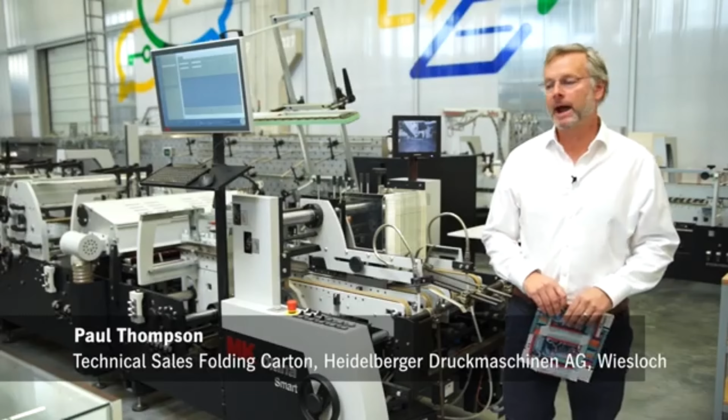I'm part of the packaging team, and I'm standing in front of our latest Diana Smart. And I'd like to continue our progress from printing through to die cutting, where we've seen this particular job being printed on the Speedmaster XL106 and die cut on the PowerMatrix 106 CSB, with obviously cutting, stripping and blanking.

So first off, the machine is actually already set and it's running a four-corner job, and we'll show that running through the automatic packing machine, the Diana Packer, before changing over to the straight line carton, complete with inline inspection and braille. But firstly, I'd like to talk a little bit about the Diana Smart.

The Diana Smart is part of our range of 4 folder gluers, which starts with the Diana Go, moves on to the Diana Easy, which gives us the abilities then for straight line, lock bottom, and also 4 and 6 corner, before moving on to the Diana Smart and then onto the Diana X range of machines, which is our most sophisticated folder gluer with all sorts of modular constructions, including a turning module.

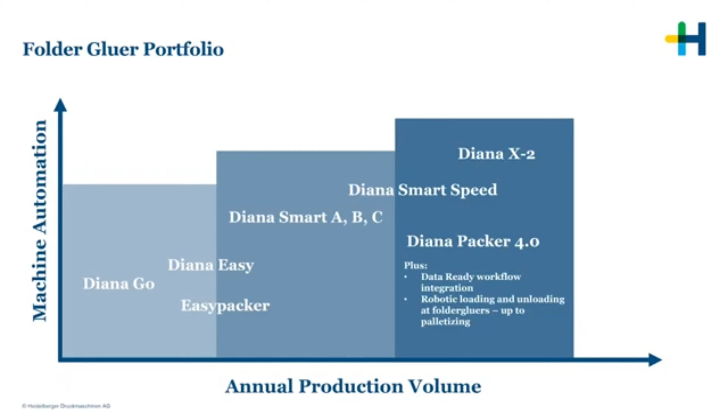On top of that, we also have peripherals around that machine in terms of semi-automatic packing machines, fully automatic packers, which we'll show you later, and also pre-feeders and stack turners. Now the Diana Smart, as very much of a brief overview, comes in 3 versions. It comes in an A model, a B version, and also a C version. The A being the most basic, really suitable for straight line and lock bottom cartons.

The B, we then put in a combination fold module, which makes the make-ready times for lock bottom cartons reduced, because we're now dedicating the lock bottom attachment into that particular module. So that gives us a little bit more flexibility and also enables us to fully utilize the 3-meter pre-fold. The C version also has the combination fold module in there, but it now also has 4 and 6 corner facilities, so we have rear folding shafts mounted into that section.

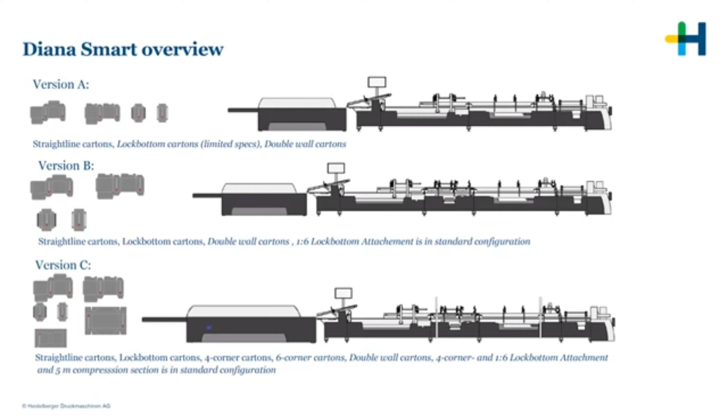In addition to that, we can add lots of other little bits and pieces. So things like the inline inspection module, a braille module can be added as complete modules, and because of the length of the machine and the open construction of the machine, it also enables us to add items like a leaflet inserter. Because it's very open, we have the space to do that, and we don't then take away some of the facilities within the machine. We still have a pre-fold section and we still have the combination fold section, which we can utilize for the folds that we require.

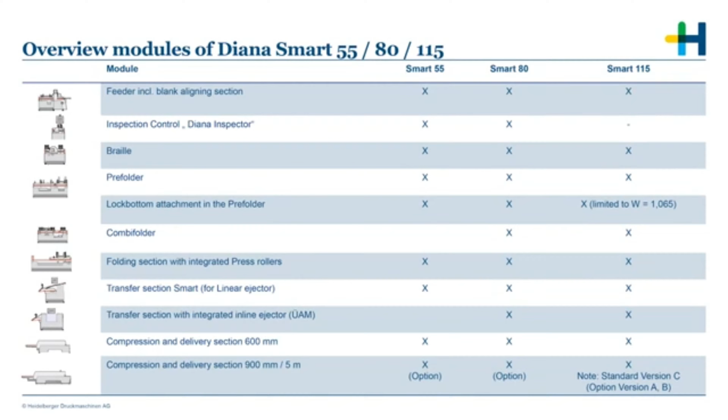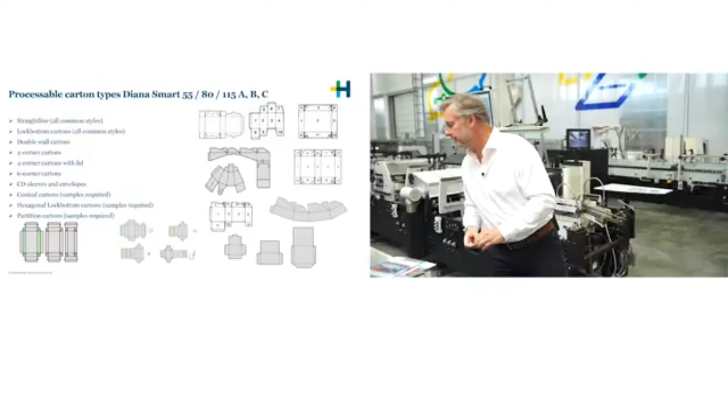As we said before, it is a modular construction, which enables us to pick and choose perhaps which delivery conveyor we would like. We can have a standard delivery conveyor, or we can then extend that delivery conveyor to either 5 meters or 7 meters. In terms of flexibility of the machine and the carton styles that we can produce, we mentioned the basic styles, but when we start to consider other items, we have a very lightweight paper pocket or envelope here.

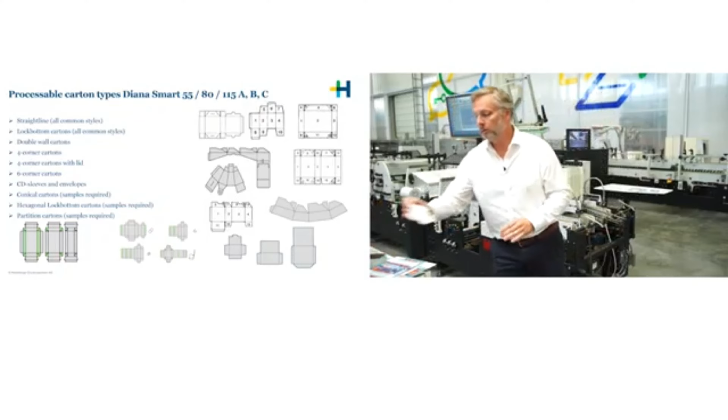We also have things like tapered cartons, so we can utilize the aligning station just behind the feeder by putting in a center carriage. We also can produce document wallets, so something like this. Very small little lock bottom cartons, and then sleeves for all sorts of things. This particular case is a chocolate box wrap.

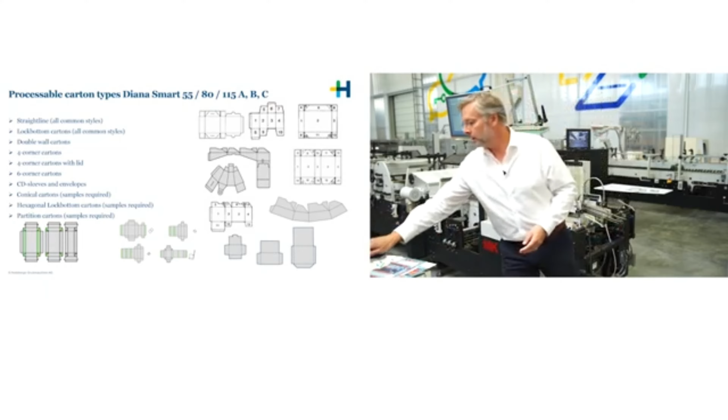And very small cartons. The minimum size of this machine goes down to a 45 millimeter open blank width. So when that carton is folded, that's 20 millimeters. And you can do that on all of our standard equipment. So right the way through from the Go through to the Diana X, we can handle those tiny little cartons.

So when we talk about some general things, we talk about performance on the machine. The belt speed of the particular machine as a standard is 450 meters a minute, but we now have an upgrade also, which will take that to 600 meters a minute, and that will be called our Diana Speed range, which when combined with the packer and also a pre-feeder, obviously you're going to get very high output from that.

The length of the modules of 3 meters in the pre-fold and 3 meters in the final fold gives us lots of flexibility. It gives us space to add additional folding modules. So things like Z-fold modules, small combination fold modules, enables the operator to set the machine very quickly and very precisely without having to mount components down the length of the machine.

The modules themselves are all independently servo driven, and we can drive the modules during the make-ready process. So we have 2 systems for aiding the operator in the make-ready. We have DigiSet, which gives him the opportunity to put the blank dimensions into the screen before going down to the individual digital indicators and winding the carriages all to 0. Once they're at 0, he knows that the position of the carriages are in the correct place.

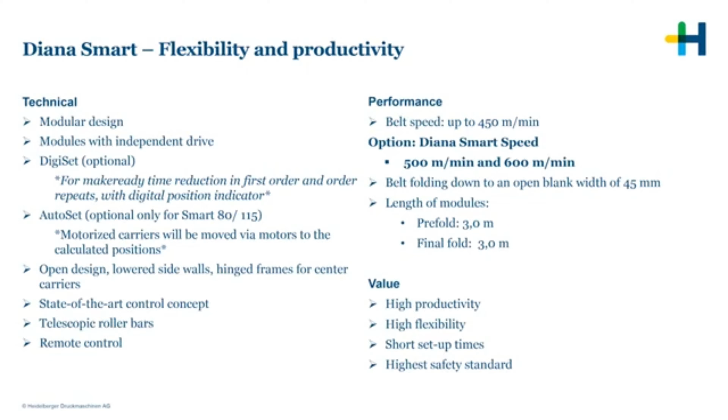With AutoSet, we go one step further. He puts the dimensions of the blank into the computer, and then by pressing the servo motors, can then adjust the position of the carriages automatically. The beauty of that system is when you have a very long machine, you're adjusting a little bit more in one position. And then when you're standing there seeing what you're adjusting, it also enables you to leave a lot of components in the machine without having to take them out.

Telescopic roller bars are commonplace in the machine. We have the ability to move those roller bars in any position. We can also shorten them so we can create space within the machine to make some special folds. So really, in summary, for the value of the machine, we have high productivity, high flexibility, we've reduced the setup times, and we also have the highest safety standards in the market.

So that's a very brief introduction of the Diana Smart. And with this, we would like to take it a little bit further and show you step by step through the machine, features and developments that we've made, and also during that process we'll carry out a complete changeover, and we'll also highlight the features on the Diana Packer.

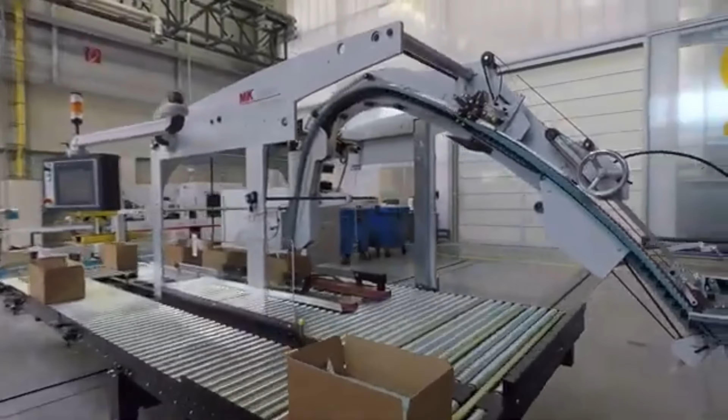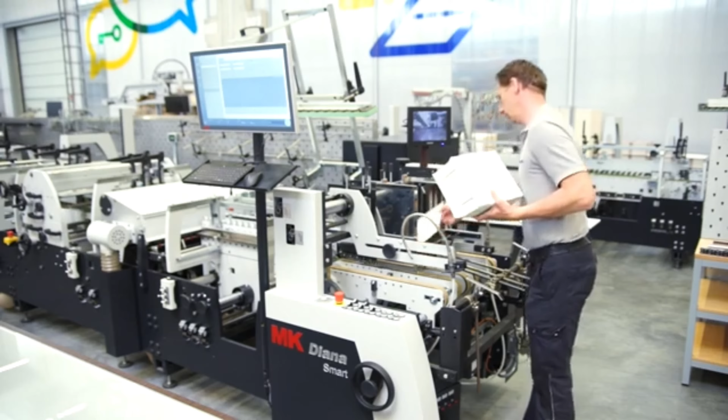So we're now going to show you a complete make-ready from the four corner tray to the straight line carton. So we'll remove the four corner cartons from the feeder. Then we need to carry out several stages before we can actually make the movement in the machine. We're starting at the feeder, we just remove the backstops. We'll lift the feeder sidewalls and loosen the feeder gates.

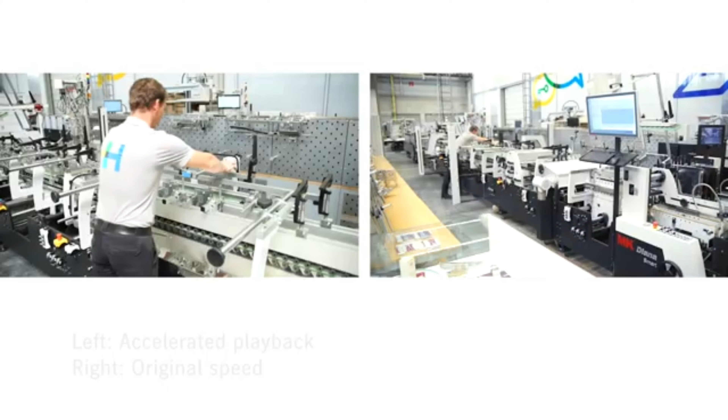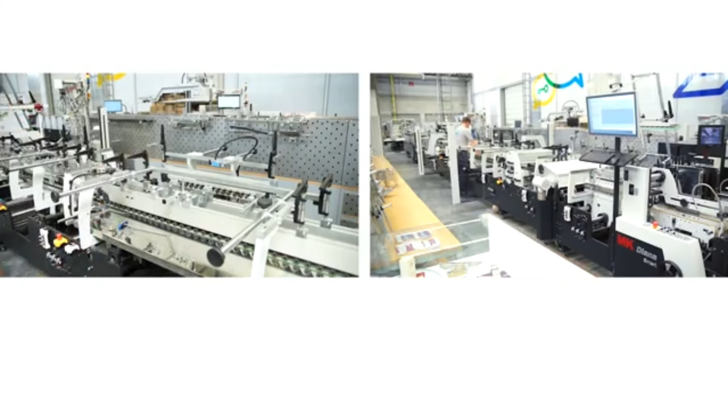Remove the top carriage and loosen it in various sections of the machine. And now we concentrate on the combination fold module. So the first thing we need to do is remove the elements that were required for the four corner carton. We need to take those out of the machine. So really it comes down to taking out the rear folding hooks, the hold down bars, the pickup hooks and the brushes and the plows.

And you'll see here the beauty of the combination fold module, that all these elements are in the same location. So we're not walking up and down the machine removing elements, we are confined to one specific area.

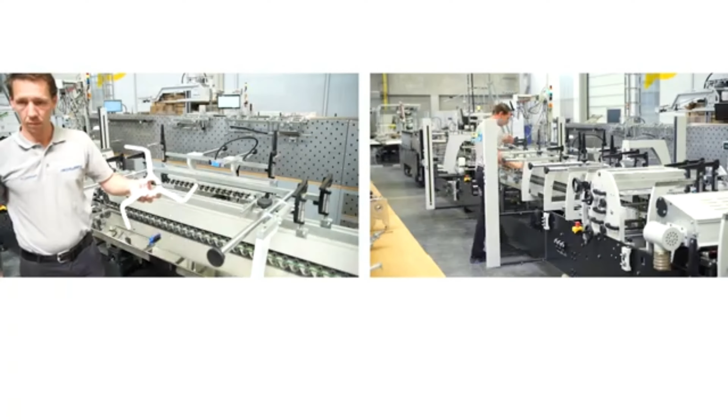The rear folding hooks are very easy to remove. We just split the coupling and then we can take them out of the machine.

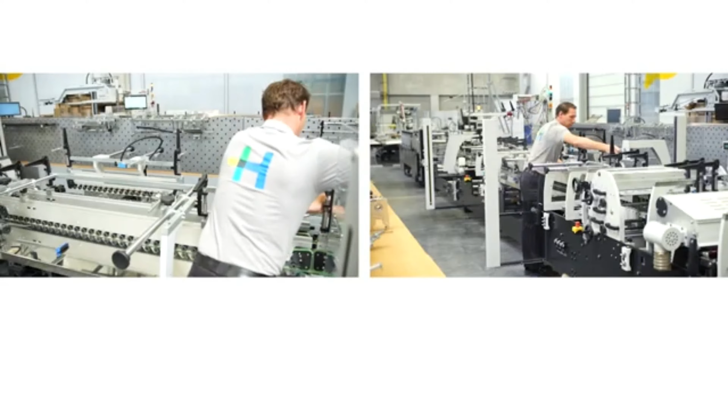These are a couple of snap-in support bars so it stops the 4-corner or 6-corner carton sagging in the middle. These are the elements he's taken out of the machine which specifically relate to the 4-corner carton.

I think it's also important you notice here that he's only used one specific Allen key, so not multiple tools for different attachments to be removed. Because of the design of the machine, it gives him the ability to make the adjustments and take the elements out of the machine just from the operator side, rather than having to walk around to the drive side.

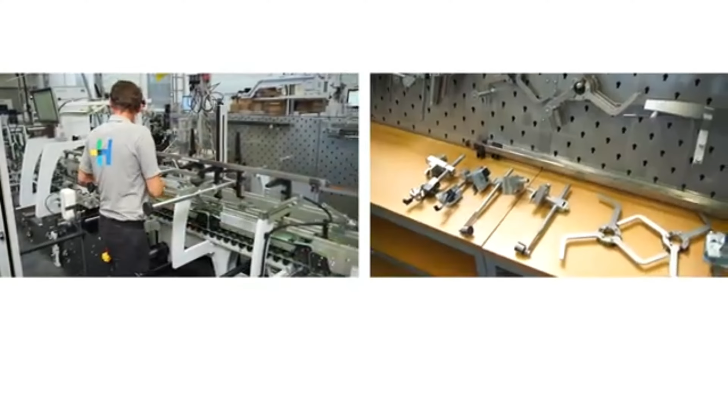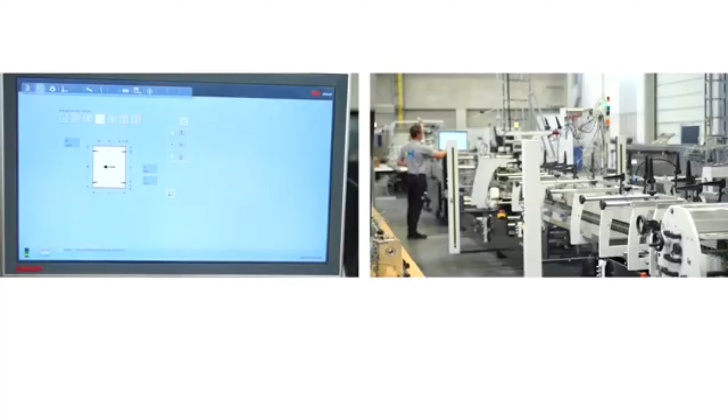So now the components have now been removed. Just prepare the rest of the machine before we program for the next job. This machine has Auto Set on there, so he will set this up as a brand new job, so he will need to enter certain dimensions into the system.

The first thing he does is select which carton profile he wants to run. He'll then tell the system whether he wants to pre-fold the third crease line, and he'll also tell it whether he wants to align the carton to the left or the right hand side.

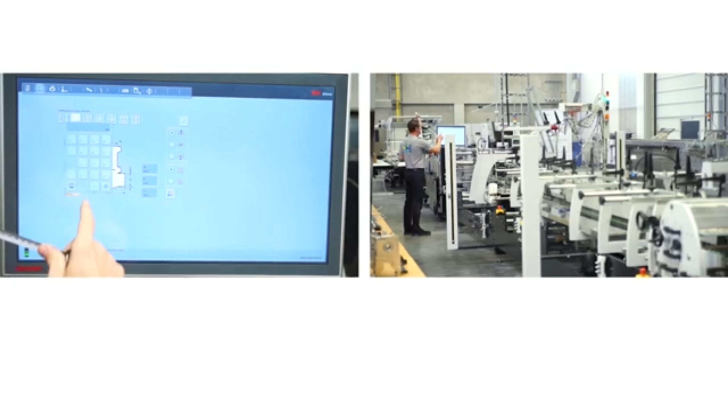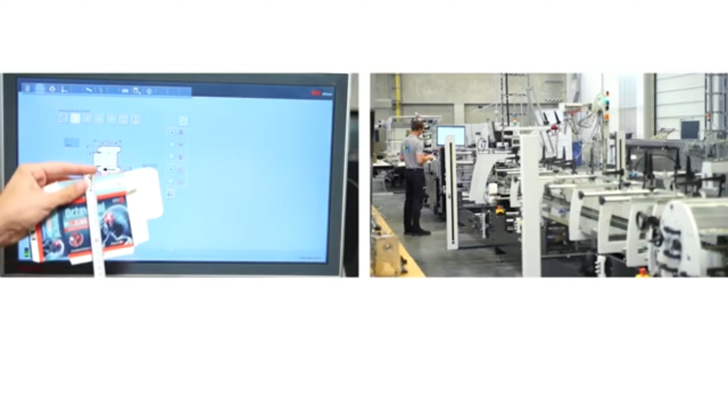He will then take some measurements and then add those to the system, mainly the length of the carton, the width of the carton, and a couple of panel widths are normally enough to give you the information you need to set the machine to. This information will then be sent down to the digital indicators and the motors. He'll accept the settings and then send it down to the system.

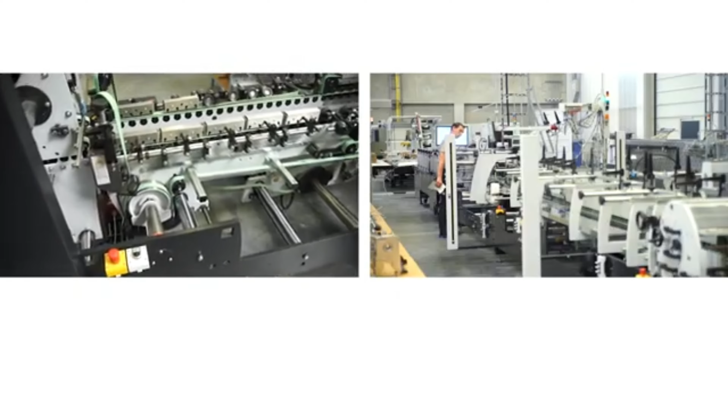You can obviously store that information into the system to recall for the next time you want to run the job. This particular machine has Auto Set Plus, which is the little white buttons here on the side of the machine, and that means he can make the adjustments to the carriages actually at the section by section. If he doesn't have Auto Set Plus, he can make the adjustment via the handset.

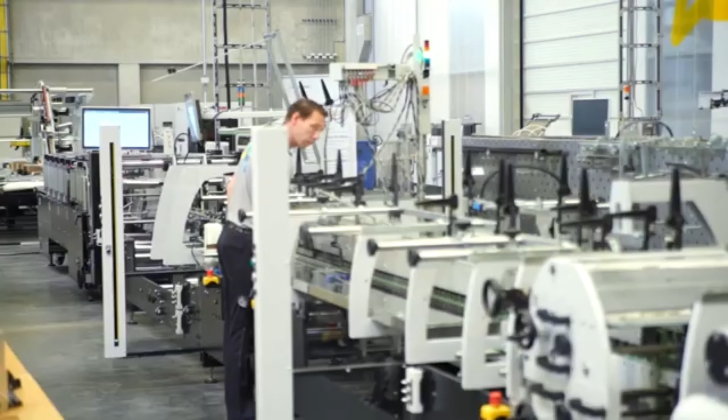Now the beauty of Auto Set is that more sections move at the same time rather than the individual digital indicators. So the make ready therefore is a little bit quicker. But as you notice, he can only set the machine section by section where he's actually standing in front of the machine so he can see what's going on. That way we enable ourselves to leave as much in the machine as possible, and we don't have to clean the machine completely out before we make a make ready.

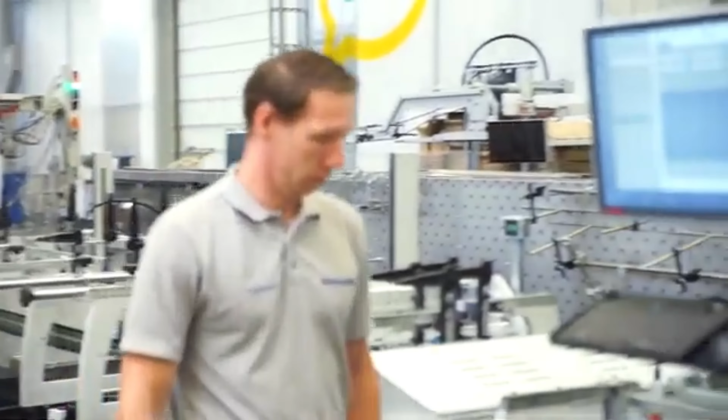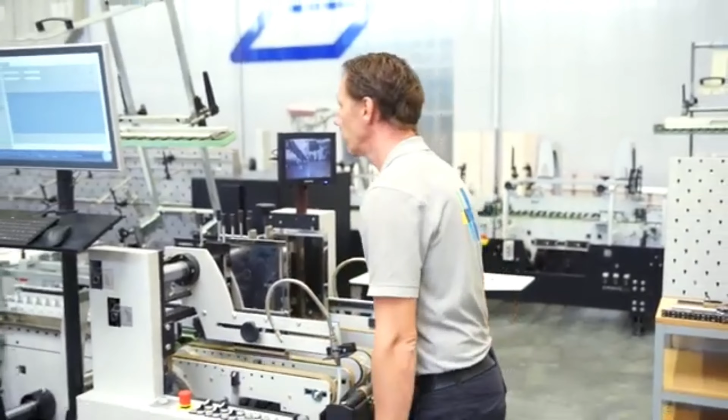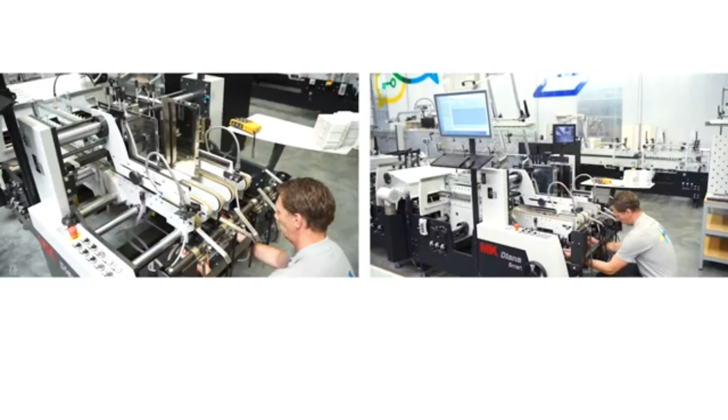This particular machine, as we said before, has Braille module and also inline inspection. As you can see, we'll just bypass those with the normal straight line box as we did with the 4-corner carton. He now comes back to his feeder. The basic setting is already made for him. Now he has to set the final positioning of the feed belts. As you can see, these are very easily declamped, moved, and then locked back up again.

So now the feeder belt carriages are locked in position. He needs now to move his sidewalls and also his feeder gates. Just drop the sidewalls. Now he's just checking the thickness of the carton to the feeder gate, so we ensure we only feed one blank at a time.

Now with the feeder pretty much set, he can load the cartons in, reposition the backstops, and now he'll begin to inch the carton down the line.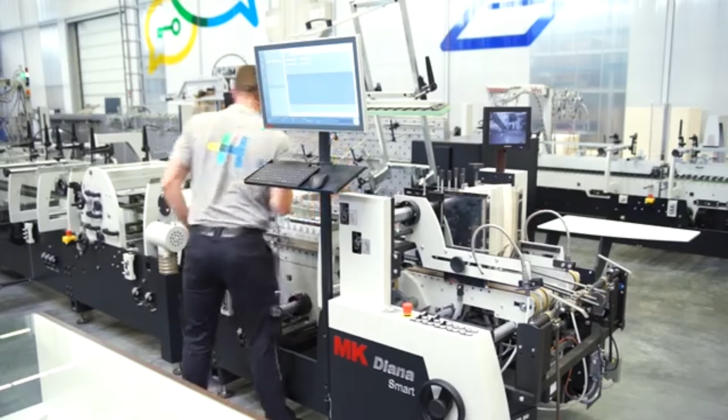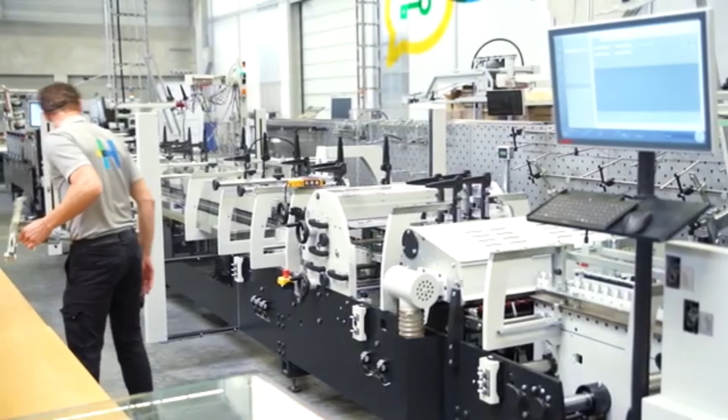Just move the braille module out of the way so it doesn't cause us any concerns when we're not using it. He's now adding the first crease pre-fold plow. This is also where we would mount the code reader if required. And as he goes, he will lock down then the top carriages. Because we're now running a straight line carton, the light guards are deactivated automatically.

Because we programmed the machine to make a third crease pre-fold, the carriages are now in the correct position for that already, so he just needs to adjust the variation of the pre-fold. He's now going to move the bottom glue pot.

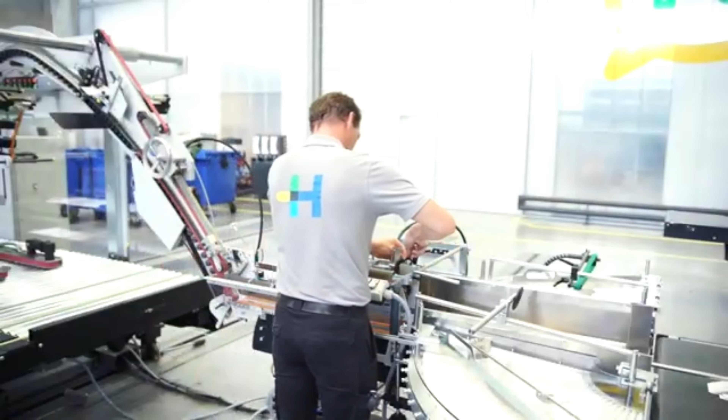It's pretty much the make ready done on the folder gluer, so now we move on to the Diana packer. So on the previous job we were running the 4-corner tray, which means that the packer was completely in line. Now because we're running a straight line carton, we need to change the orientation of the straight line carton. So we pack on crease line 2.

So as you look down the machine, we use the turning station on the left hand side of the machine, so we're turning the carton from left to right. And he needs to adjust then the backstop where the carton is put into the buffer zone.

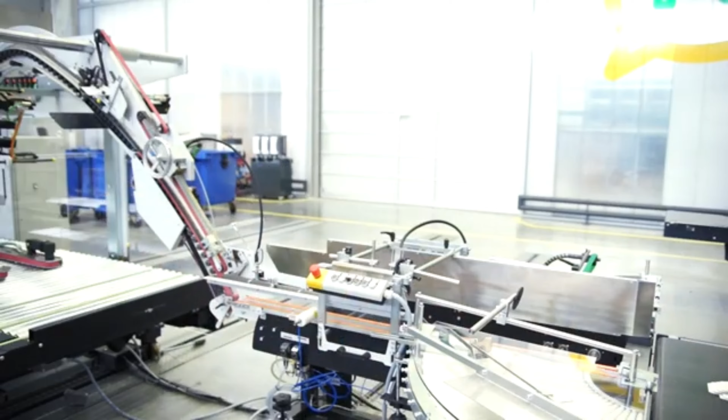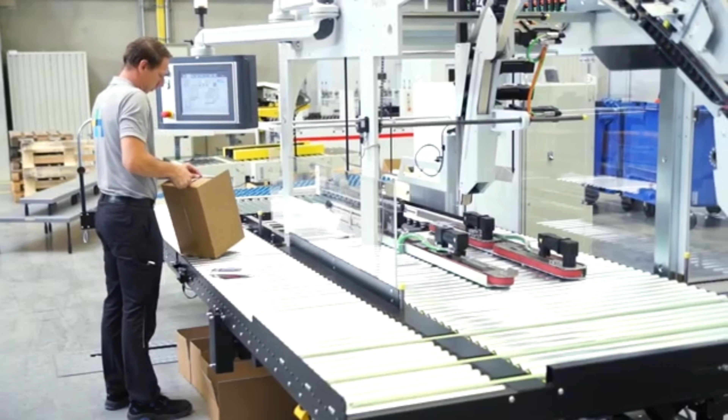Because the packer also has DigiSet, he will now go to the packer. Again, as it's a new job, he will program the packer in terms of the case size and the individual cartons that are going into the case, the number of cartons going into the case, and the height of the travel of the stacking arm.

That's the case programmed. Now he'll do the carton. So at the same time as programming this, he'll also program how many rows and how many layers the carton needs to be packed in.

Then he has to make some minor adjustments to the actual filling conveyors, the 2 sets of red belts there. So he's moving those sideways, so it's a different case size to the previous job, and obviously the packer is in a slightly different position to previously, and the filling arm itself also needs to be moved across.

Because with DigiSet, all he needs to do is wind all the carriages then to 0, and then we know they're in the correct position. And the rest of the information is sent automatically through the computer system in terms of layers, rows, the stack height, the packing arm. We need to put a few extra cases on there so we can complete the system.

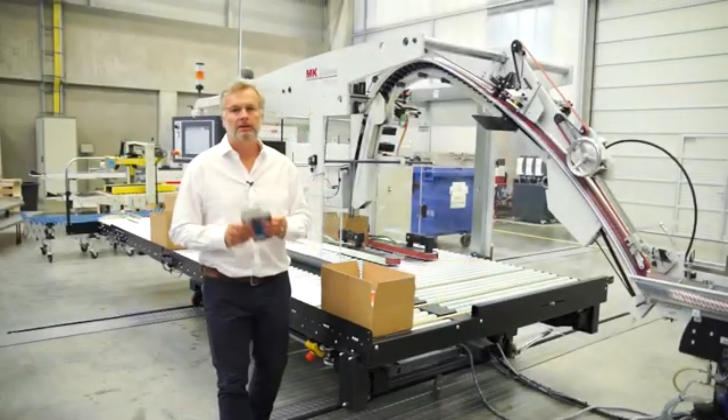We've shown you printing on a Speedmaster XL106. We've shown you die cutting on a Power Matrix 106 CSB with cutting, stripping and blanking. And we've now shown you folding and gluing on a Diana Smart version C. This particular machine is an 80, but there's also a 115 available.

And in addition to that, we've applied Braille on the first panel, and we've also quality inspected the whole carton. So every single carton that's come through that machine now is of the same high quality standard that your customer expects it to be.